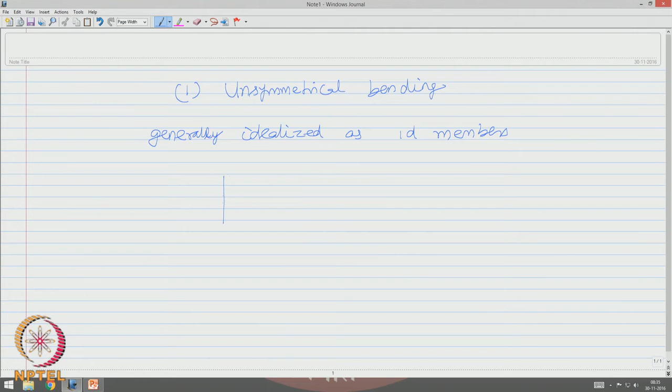We know generally structural members like beams, columns, etc. are generally idealized as one dimensional members. If you take a beam of a rectangular cross section, the length of the beam is so large compared to the cross sectional dimensions of the beam, so we idealize this as a one dimensional member.

Each member generally has preferably an axis of symmetry, or at least one axis of symmetry, the intersection of which will be the center of gravity or mass center of this body for any given cross section.

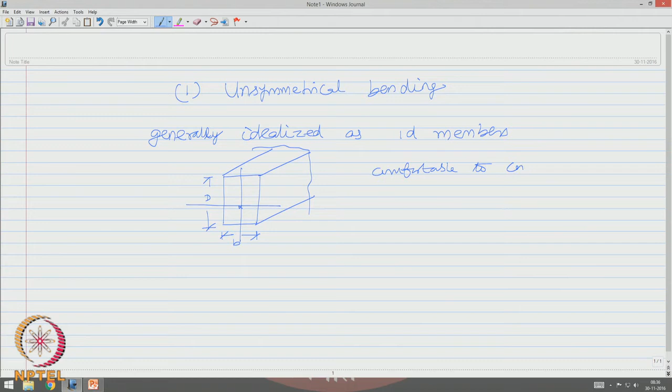If the load is applied on this, it is very comfortable and easy to compute the stresses in the cross section if loads are applied at prefixed points, or I should say planes.

Generally, so far in all structural analysis of classical methods, it is assumed that bending takes place parallel to the plane of applied moment. If this statement is true, then obtaining bending stress by the classical theory of M by I into y from the flexural equation is easy and convenient to apply.

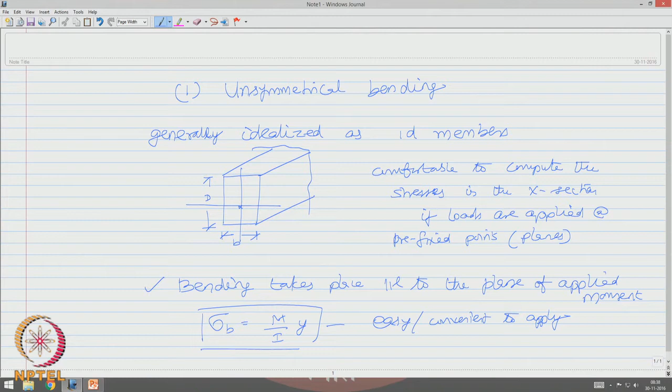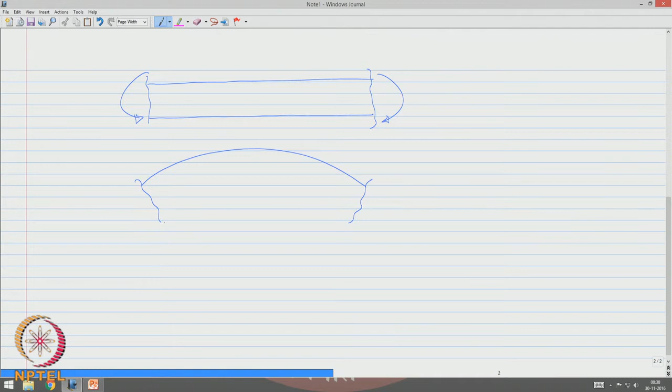But in many cases this statement may not be true. Let us take a beam subjected to a bending action which will make the beam bend this way, forming tension because of elongation of fibers on the top and compression because of contraction of fibers at the bottom.

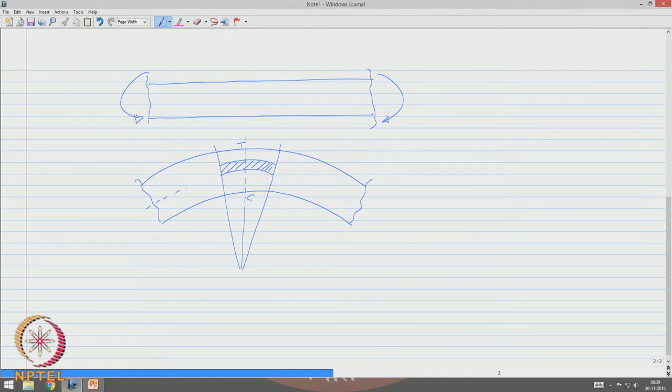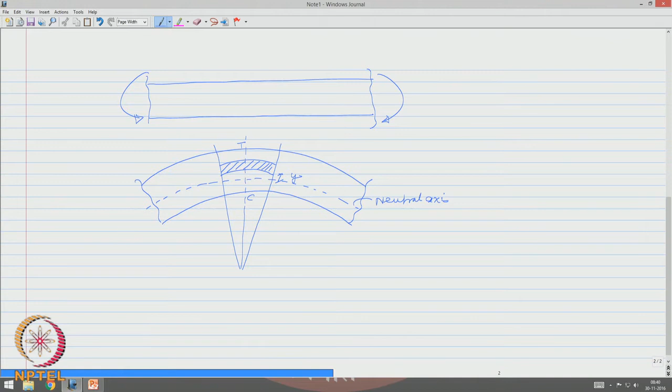If you cut a segment and take a layer at a distance y from the neutral axis - let us say this is my x axis and this is my y axis, and the applied moment is Mz - one can easily apply the conventional bending equation to find the bending stress caused by the moment Mz.

To be very specific, we should then say sigma x by y can be Mz by Izz, which is also otherwise equal to E by r.

So interestingly, a typical cross section of any form will have the z axis, will have the y axis as marked here, subjected to Mz, and that is the mass center of the body.

So obviously one can now say that in the above figure, the y axis actually represents the trace of the plane of applied moment, whereas the applied moment is actually Mz.

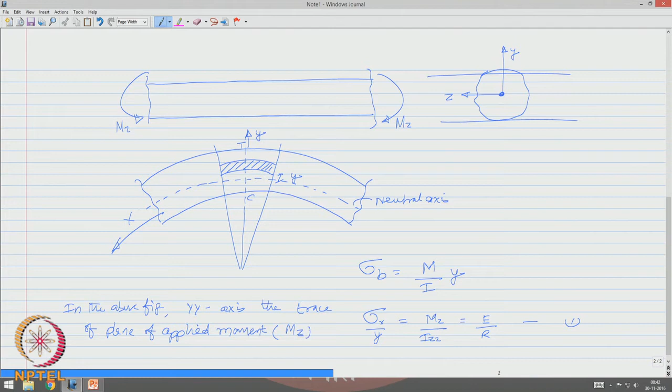Therefore, moment is assumed to be applied causing bending in planes parallel to the plane of applied moment.

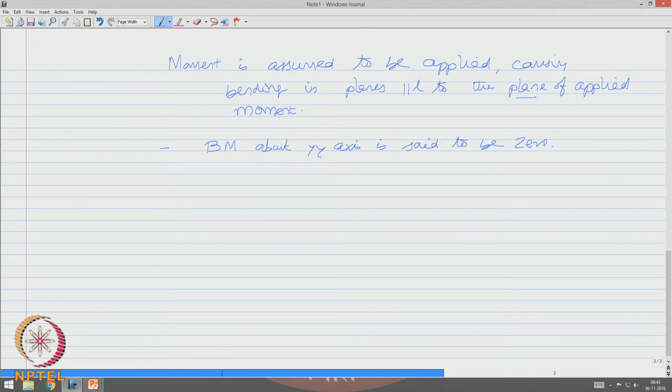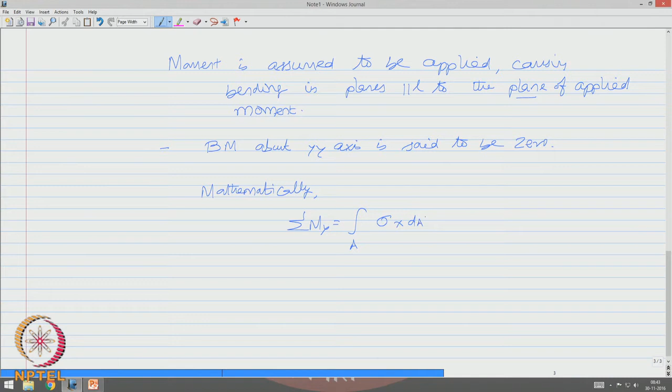Under this condition, we can then say bending moment about the y axis is said to be 0. Mathematically, the algebraic sum of moments about the y axis, given by sigma x dA, is then said to be 0, which amounts to an equation which says the integration of zy dA should be set to 0.

This will be true only when z and y axis are principal axes of inertia.

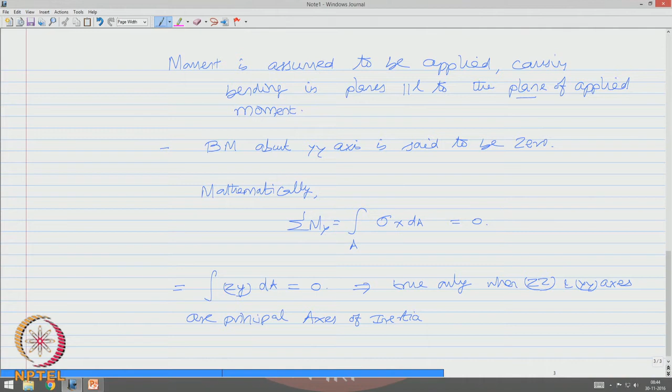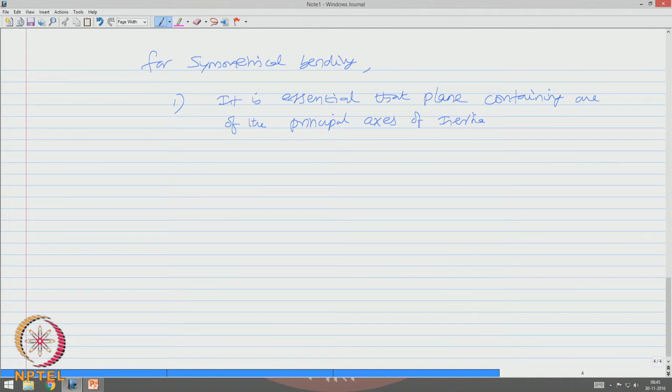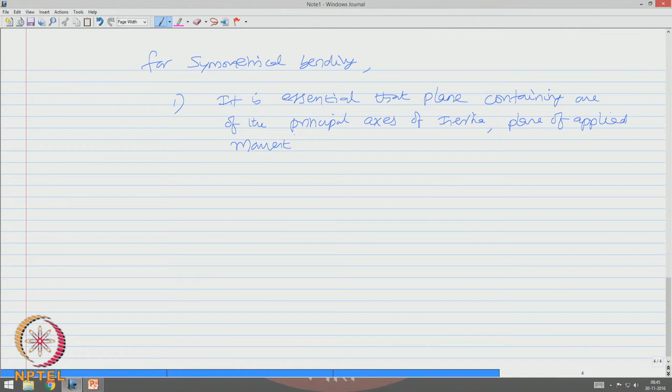Therefore, for symmetrical bending, we have the following observations. It is essential that the plane containing one of the principal axes of inertia, the plane of applied moment, and the plane of deflection should coincide.

Second, it is therefore obvious that the neutral axis will coincide with the other principal axis of inertia.

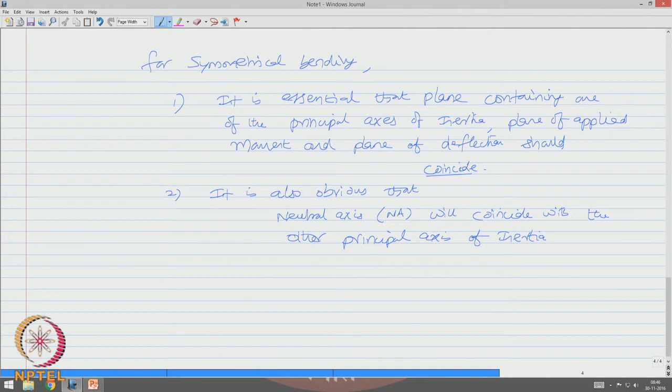That is a standard case which generally happens in almost all members which are assembled to become a structural configuration. But in the case of unsymmetric bending, in other cases...

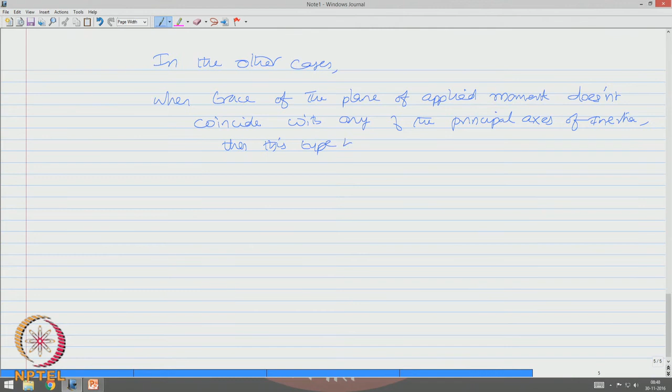When the trace of the plane of applied moment does not coincide with any of the principal axes of inertia, then this type of bending is called unsymmetric bending. It is also otherwise called non-uniplanar bending.

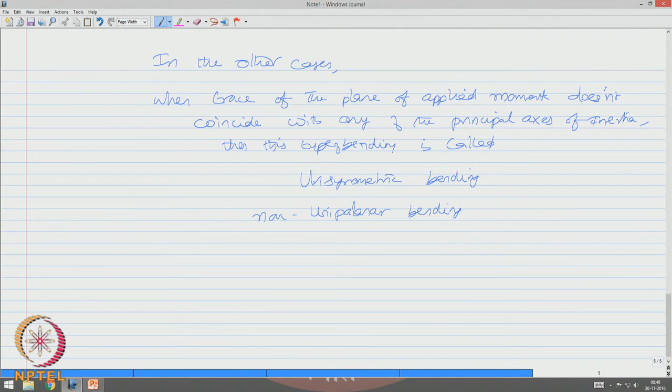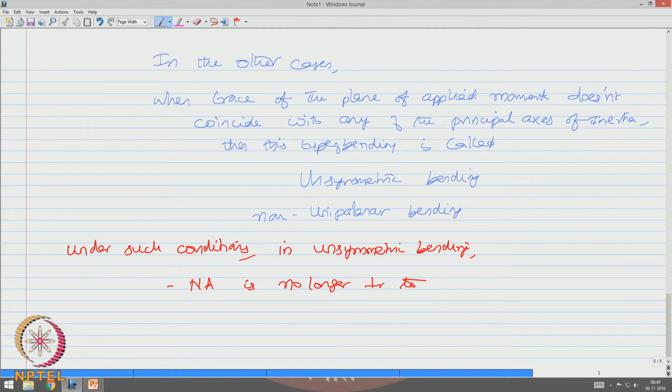In this case, non-uniplanar bending occurs because the cross section is unsymmetrical. Therefore, under such conditions of unsymmetric bending, the neutral axis is no longer perpendicular to the trace of the applied moment plane.

The deflection curve is also not a plane curve.

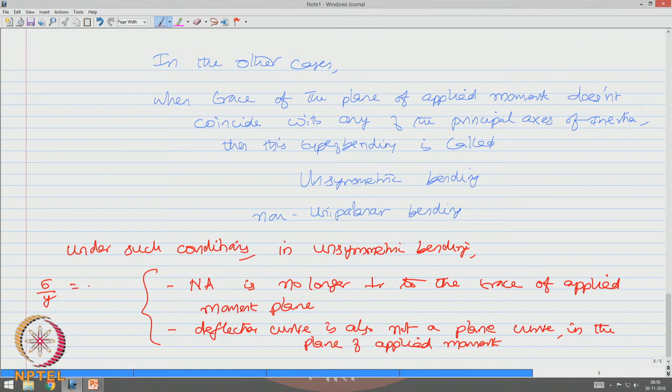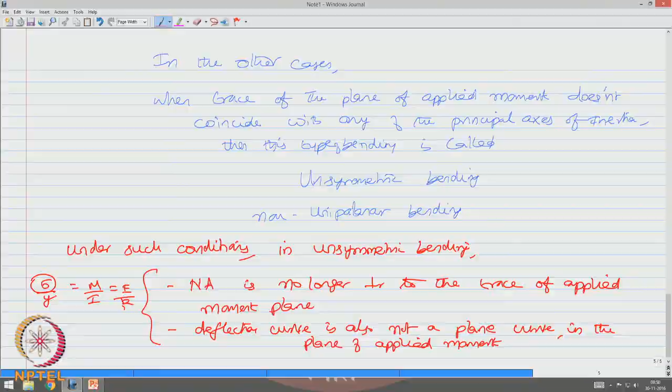In the plane of applied moment, this complication will lead to non-usage of the standard theory to obtain the bending stress. So bending stress cannot be obtained by a straightforward equation of flexure. The complications arise because the neutral axis is no longer normal to the trace of the applied moment, and we know the distance of the extreme fiber is measured from the neutral axis normal to that. The moment should be on the trace of the applied plane, and I should be with respect to the axis of bending. All these complications add up, so the simple bending stress cannot be obtained by standard equations of flexure.

Let us ask what would be the consequence of unsymmetric bending. First, the neutral axis is not perpendicular to the trace of the applied moment plane.

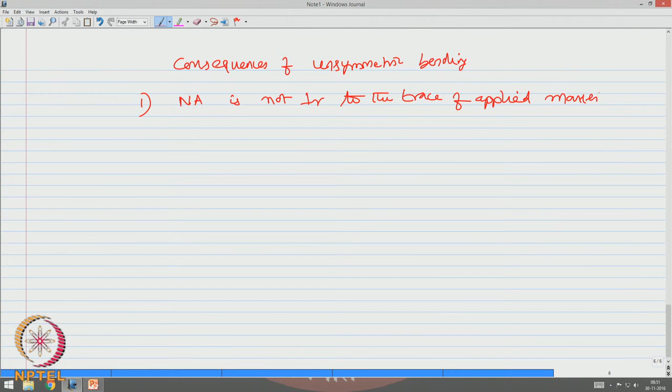This happens for members or cross sections which are not symmetric about the vertical axis, and also thin sections undergo twisting under transverse loads.

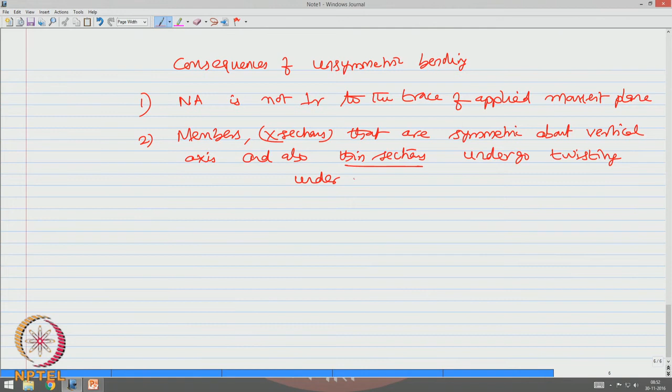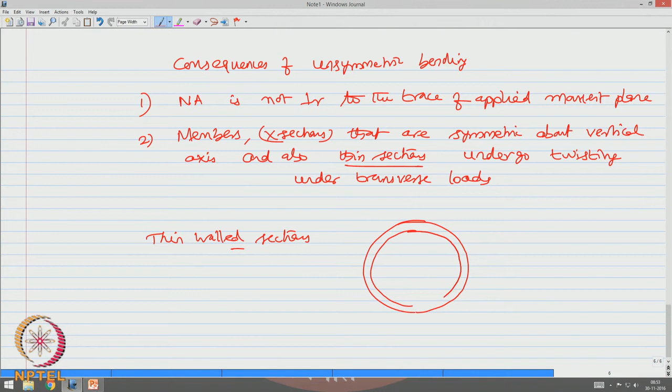Let us see how these consequences are important for members in offshore structures. Interestingly, in offshore structures, people use thin walled sections. The reason is we need a member, maybe circular in shape, with large diameter to enable good buoyancy force, and less thickness to make it lighter, so that installation, fabrication, constructability, and decommissioning all become easy and simple. So obviously we are dealing with sections which are thin walled in nature.

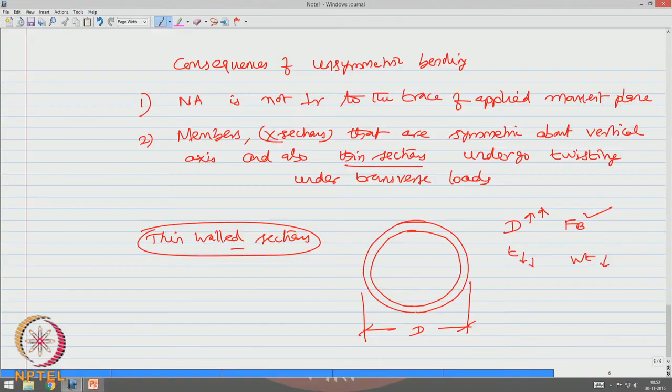If the plane of bending does not coincide with the plane of the applied moment, we always have unsymmetrical bending cases. Therefore, estimating bending stresses in such cases under special loads as well as nominal loads will be tricky.

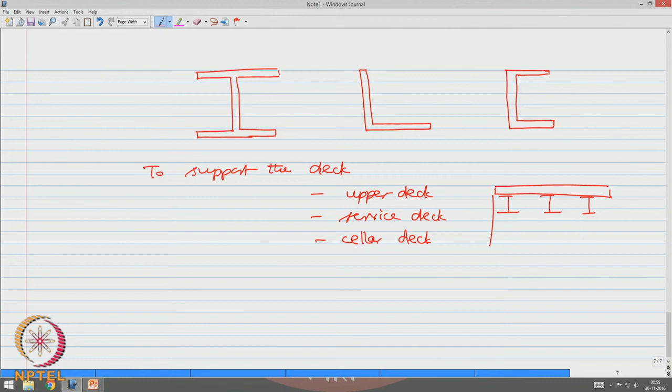Let us take up examples of cross sections like I-sections, angles, channels, which are generally used to support the deck - the upper deck, the serviceable deck, service deck, cellar deck. For example, the deck may be a plate of some thickness. You need to support the deck because it has larger spans, using cross beams, columns, and another deck. Maybe the deck is supported with a lattice truss girder, etc., where a platform may be constructed to have all arrangements like a flare boom, a drilling derrick, etc.

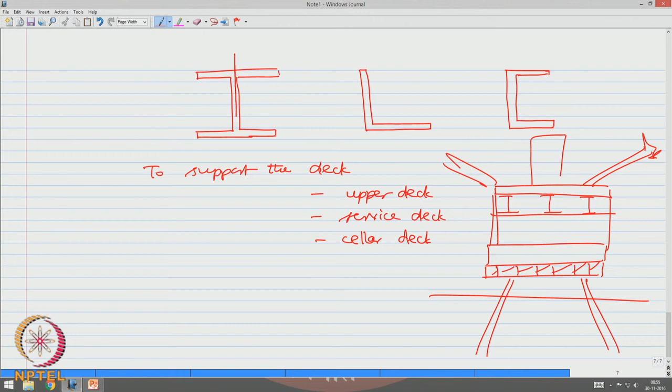So when these members, which anyway have two axes of symmetry, have loading that is not applied parallel to either one of them, or it is applied with a small inclination to any one of the planes - alpha maybe even 1 degree - the estimated bending stresses or computing the neutral axis position to estimate the bending stresses is not simple.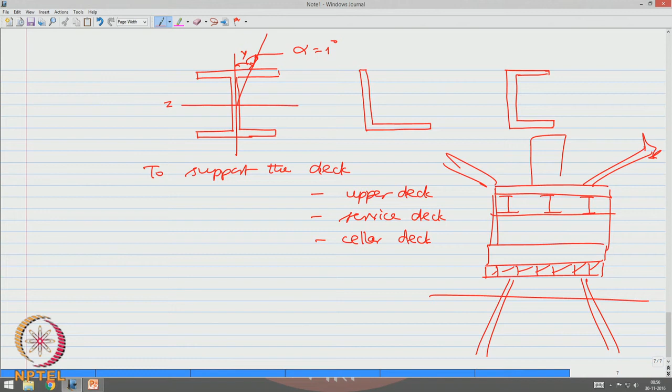It is complicated. We need to understand the analogy behind estimating bending stresses by locating the principal axis of inertia, then locating the position of the neutral axis, and then measuring the distance of fibers required to estimate stresses with respect to the neutral axis along the principal axis of inertia to get the bending stresses.

It is also observed that even a small inclination of 1 degree of loading, which can happen accidentally in given construction practices in offshore structures, can cause a good hike in the bending stress, which can be as high as 25 to 30%. We will take an example and demonstrate this later.

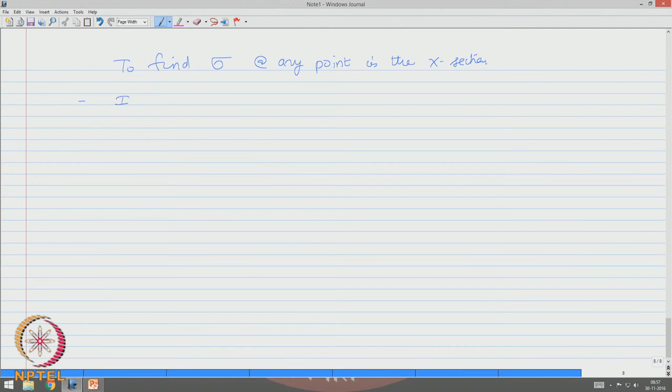Now let us try to understand systematically how to find the bending stress in case of unsymmetric bending. The objective is to find the bending stress at any point in the cross section. We already know that in case of unsymmetric bending,

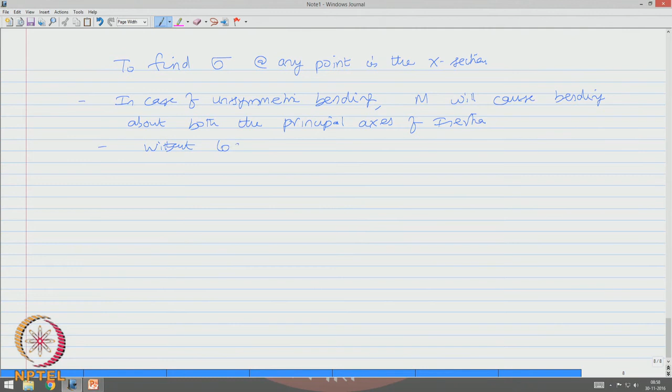the moment will cause bending about both the axes of inertia. So without locating these principal axes, one cannot estimate the bending stresses.

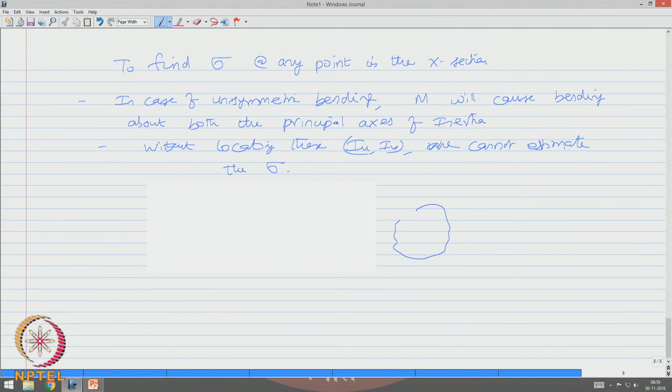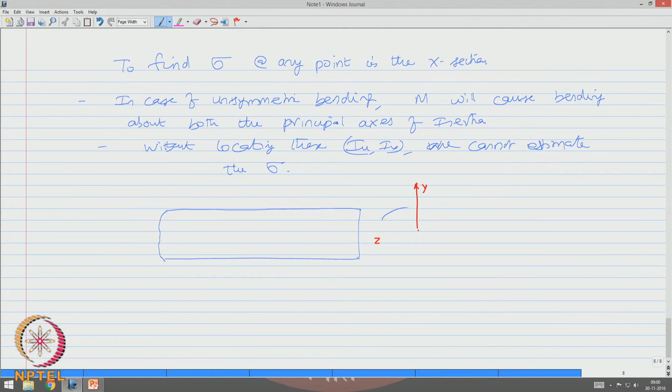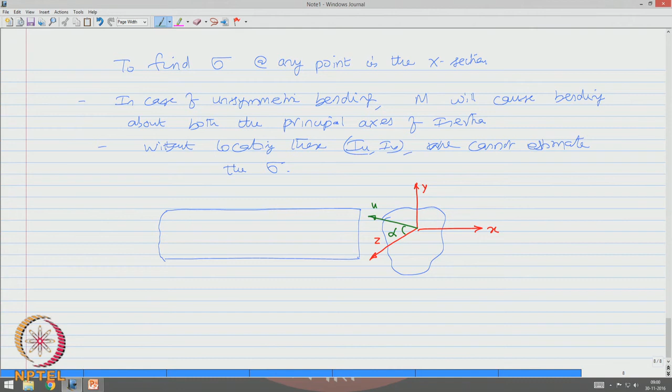Let us take a beam whose cross section may be of any shape, which has got axes z and y. Maybe we will put z slightly inclined. Let us say this is my x axis. I have now a principal plane u, which makes an angle alpha with z. Let us talk about this plane,

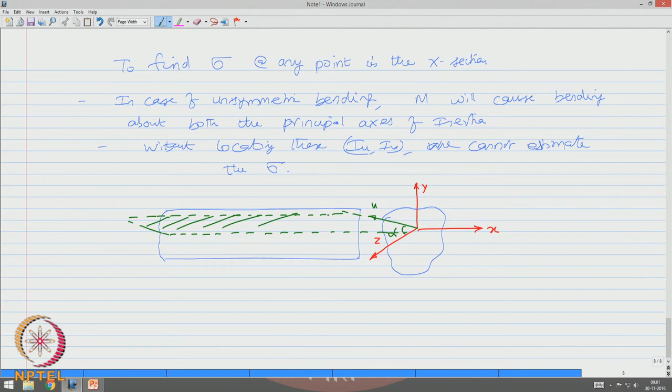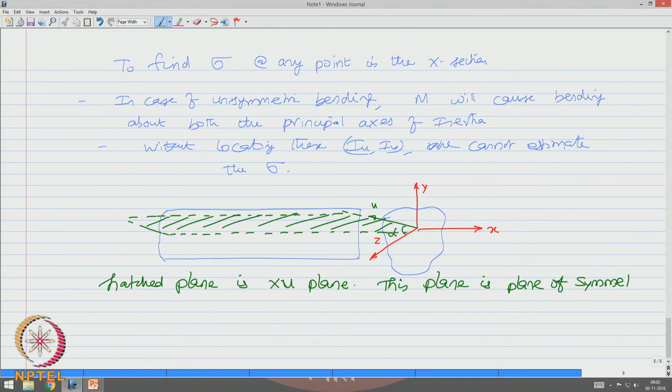which is the XU plane. So the hatched plane is the XU plane. This plane is the plane of symmetry, for a simple reason: the cross product of u and v is set to 0, where u and v are principal axes of inertia.

So when you are able to locate these principal axes of inertia, then one can use the conventional flexure formula to estimate the bending stress.

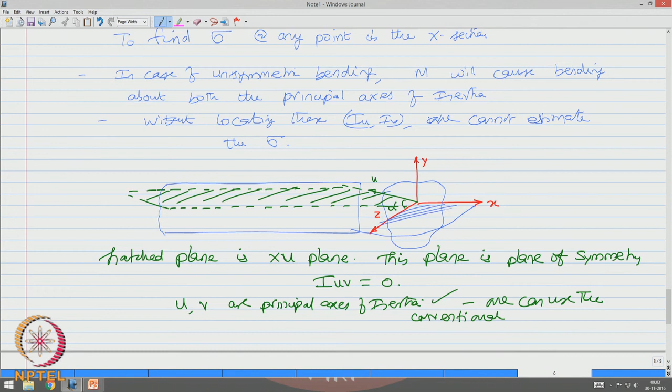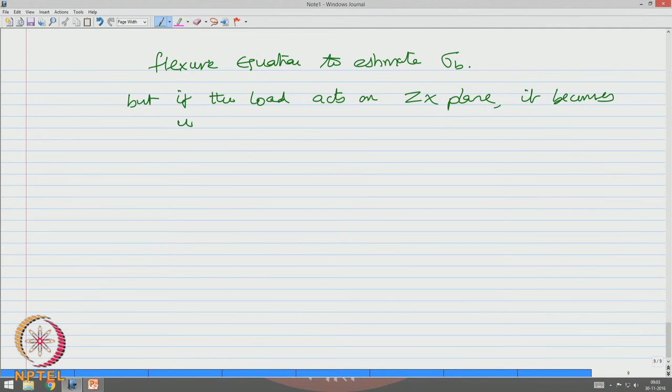But if the load acts on the zx plane, it becomes unsymmetric. If the load acts on the zx plane, then it becomes unsymmetric. So one cannot use the conventional equation of flexure to obtain the bending stress.

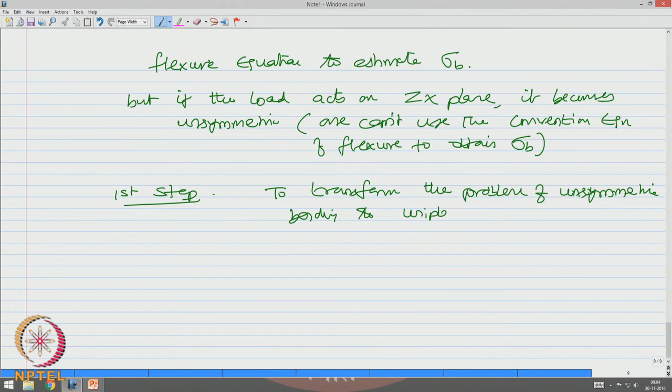So what should one do in that case? The first step obviously will be to transform the problem of unsymmetric bending to uniplanar bending. How to do this? To do this, one needs to locate the principal axis of inertia.

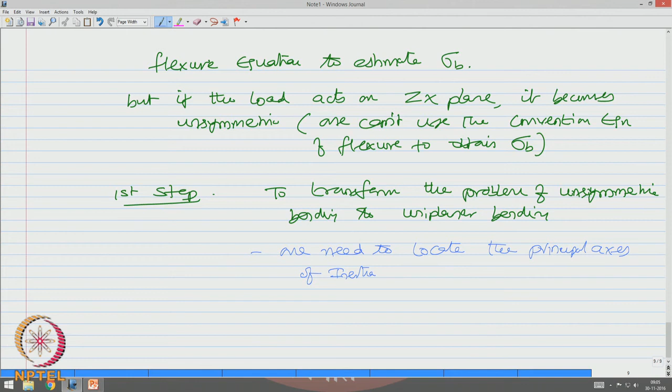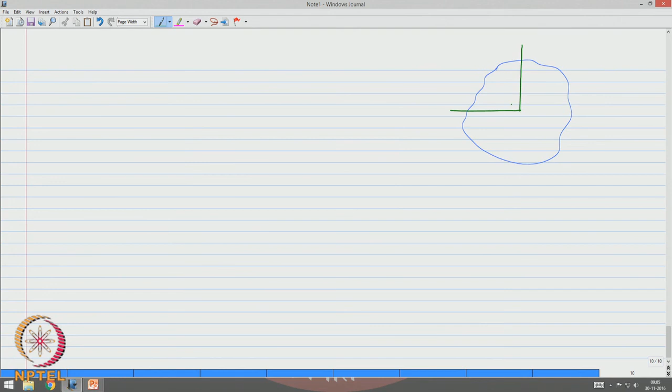The problem now originates from a simple start: for a given cross section, try to first identify the principal axis of inertia. Let us take a cross section of any shape. Let us mark the axes as Z and Y. Let us take any point whose elemental area is dA.

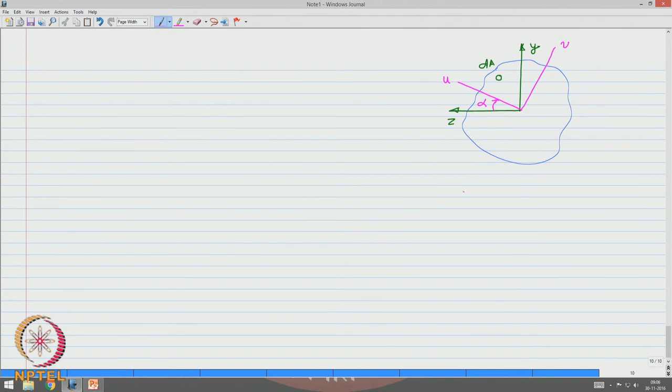Now I want to locate two axes, U and V, at an angle alpha from Z. Interestingly, alpha is measured in the positive V coordinate - that is the sign convention we are following.

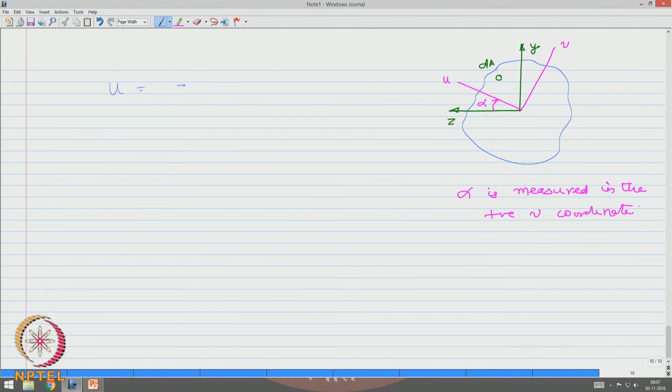In that case, U can be given by Z cos alpha plus Y sin alpha, because U can be resolved as Z cos alpha and Y sin alpha, whereas V will be in the opposite direction: minus Z sin alpha plus Y cos alpha, because if this angle is alpha, this is also the same angle. So Y cos alpha and minus Z sin alpha - we call this equation number 1.

To estimate the bending stresses at any point in the cross section, one needs to calculate the moment of inertia, which is the second moment of area, about the UU and VV axis.

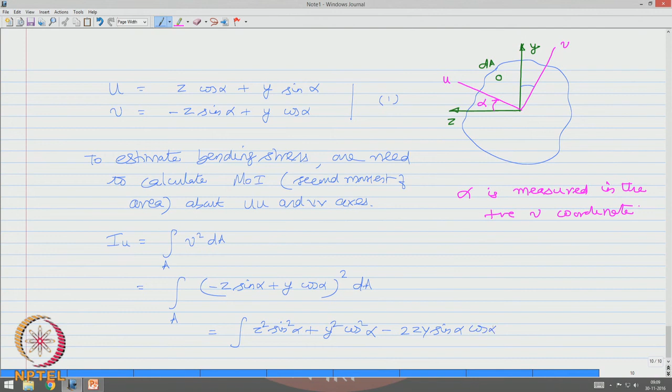From the first principles, IU is the integral over the entire area of V square dA, where V is taken from equation 1: minus Z sin alpha plus Y cos alpha, the whole squared, dA, which becomes integral of Z square sin square alpha plus Y square cos square alpha minus 2ZY sin alpha cos alpha dA over the entire area A.

This can be written as sin square alpha taken out, since it is not a variable over dA, integrated for the entire area Z square dA, plus cos square alpha times the entire area Y square dA, minus 2 sin alpha cos alpha, which is sin 2 alpha, times the entire area YZ dA.

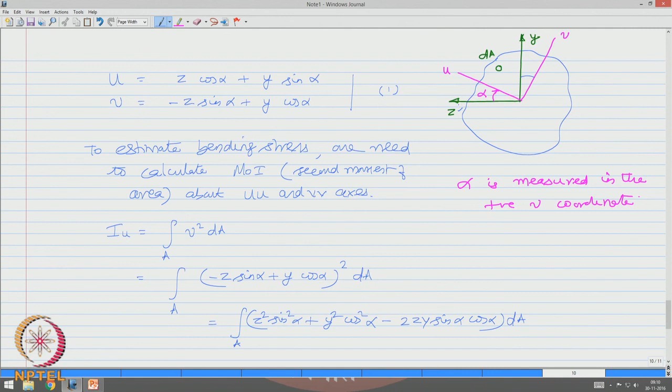Z square can now be said as Iy sin square alpha. Please see this figure - Z is the horizontal axis. Z square, the second moment of area, will give me Iy. So Z square gives Iy, plus cos square alpha Iz, because Y square gives Iz, minus this is the product of moment of inertia, which is sin 2 alpha.

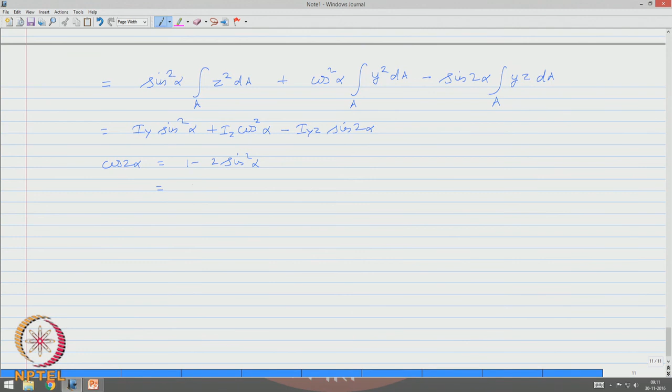We also know cos 2 alpha is 1 minus 2 sin square alpha, and it is also equal to 2 cos square alpha minus 1. Let us substitute this in the above equation. So we now say Iu is equal to Iy by 2 times 1 minus cos 2 alpha, plus Iz by 2 times 1 plus cos 2 alpha.

Substituting these equations here, minus Iyz sin 2 alpha, which now gives me Iy plus Iz by 2, plus Iz minus Iy by 2 cos 2 alpha, minus Iyz sin 2 alpha. I can rewrite this slightly as Iz plus Iy by 2, plus Iz minus Iy by 2 cos 2 alpha, minus Iyz sin 2 alpha, which is my Iu. Equation 2.

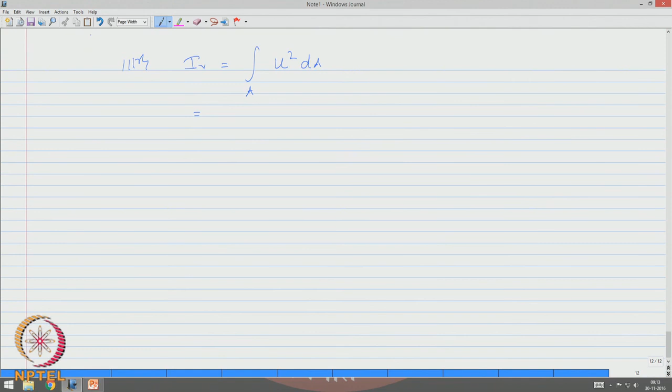Similarly, Iv can be expressed as the integral over the entire area of U square dA. Now U can be seen from this equation as Z cos alpha plus Y sin alpha. So integral over A of Z cos alpha plus Y sin alpha, the whole squared, dA, which becomes Z square cos square alpha plus Y square sin square alpha plus 2ZY sin alpha cos alpha dA.

This can be separated as cos square alpha times the area integral of Z square dA, plus sin square alpha times the area integral of Y square dA, plus 2 ZY sin alpha cos alpha, plus sin 2 alpha times the area integral of ZY dA. We already know the first integral gives Iy, the second gives Iz, and the third is Izy sin 2 alpha.

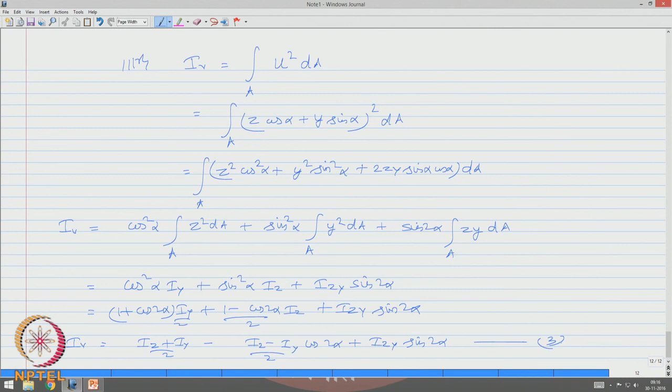Interestingly, adding equation 2 and 3, we get Iu plus Iv equals Iz plus Iy.

We will proceed further in the next lecture, estimating and locating the neutral axis and bending stresses with some examples. We have now realized that unsymmetric bending is an important application in structural engineering problems. Nevertheless, it is important in members in offshore structures. Let us understand the analogy behind estimating bending stresses when subjected to unsymmetric bending.